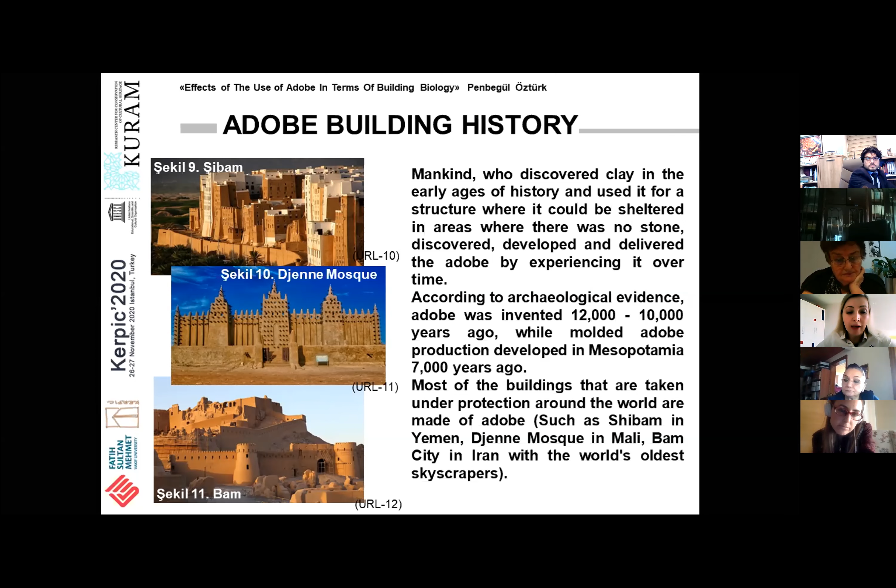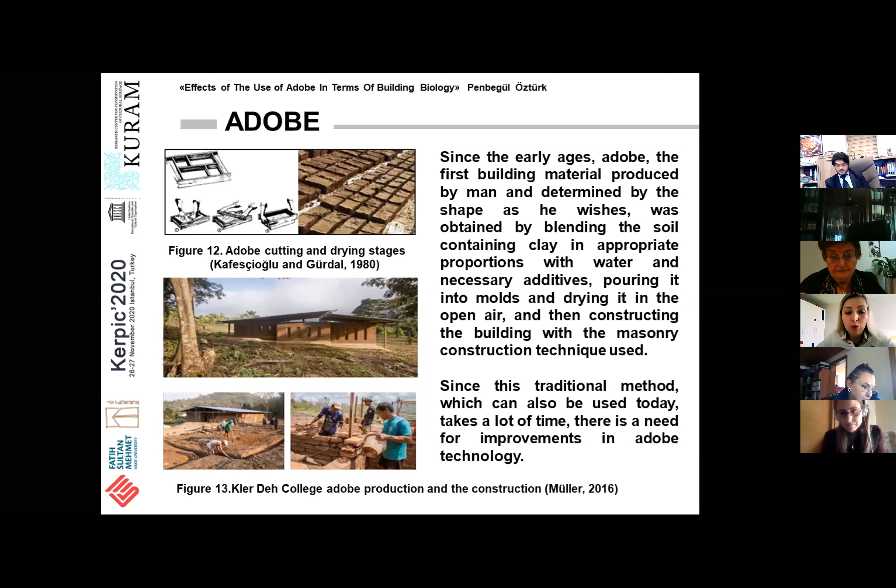İlk çağlarından itibaren insanın ürettiği ve biçimini istediği gibi belirlediği ilk yapı malzemesi olan kerpiç, uygun oranlarda kil içeren toprağın su ve gerekli görülen katkı maddeleri ile harmanlanıp yoğrularak kalıplara dökülmesi ve açık havada kurutulması ile elde edilmiş, sonrasında yığma yapı tekniği ile yapı inşasında kullanılmıştır. Günümüzde de kullanılabilen bu geleneksel yöntem çok fazla zaman aldığı için kerpiç teknolojisinde iyileştirilmelere ihtiyaç duyulmaktadır.

Kerpicin durabilitesi, yani kerpiç teknolojisi yenilenirken şunlara da dikkat etmek gerekiyor. Biraz önce de bahsettiğim gibi güvenilir yapı oluşturmak gerekiyor. Yani kerpiç yapının içerisinde konforu sağlarken önce o yapının güvenilirliğini sağlamak gerekiyor. Kerpiç yapı üretimi teknolojik olarak basit olsa da bozulmasına neden olan faktörlerden korunması yoluyla sürdürülebilir nitelikli dayanıklı yapılar üretme potansiyeline sahip bir yapı malzemesidir. Toprak malzemelerin ana zayıflıkları dayanıklılıkla ilgilidir.

Toprak taneleri su miktarına bağlı olarak nemlenirse mukavemet azalır, su fazla ve sürekli ise taneler birbirinden tamamen ayrılır, su ile beraber akarak giden yapı yıkılır.

Kerpicin fiziksel stabilizasyon, yani karışıma organik madde katkısı, mekanik stabilizasyon, yani karışımın sıkıştırılması, kimyasal stabilizasyon, karışıma alçı, kireç, çimento ve benzeri stabilizatör katmak gibi önlemlerle durabilitesi sağlanabilmektedir.

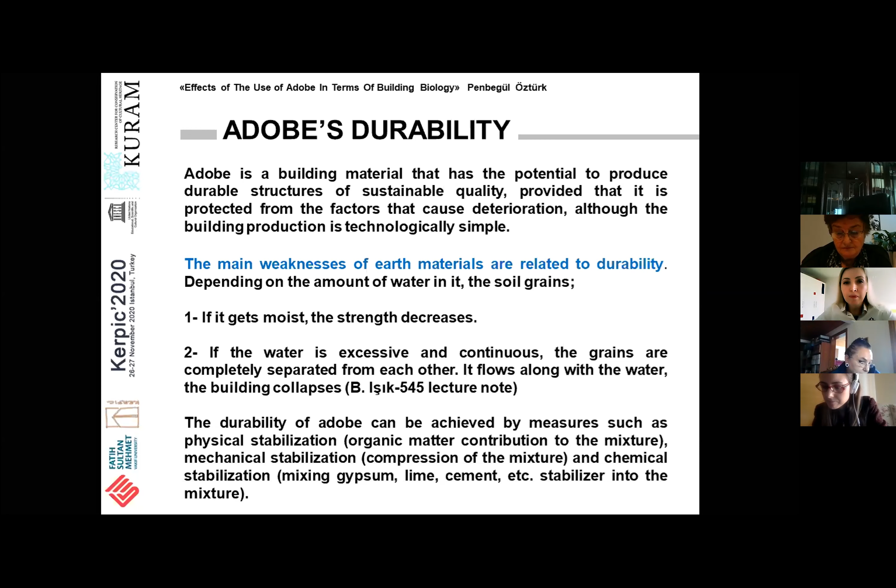Kerpiç yapı uygulamasında kerpicin konumlanacağı iyi bir zemin oluşumu önemlidir. Yağmur suyu, yeraltı suyu gibi kerpicin bütünlüğüne zarar verebilecek etkenlere karşı önlem alınmalı. Kerpiç yapı yüzeyi çatı çıkıntıları ile yüzey erozyonuna karşı korunmalıdır. Burada şekilde de yağmur etkisiyle ve zemin suyu etkisiyle yapı yüzeyindeki ve yapıdaki etkiler gözlemlenmektedir.

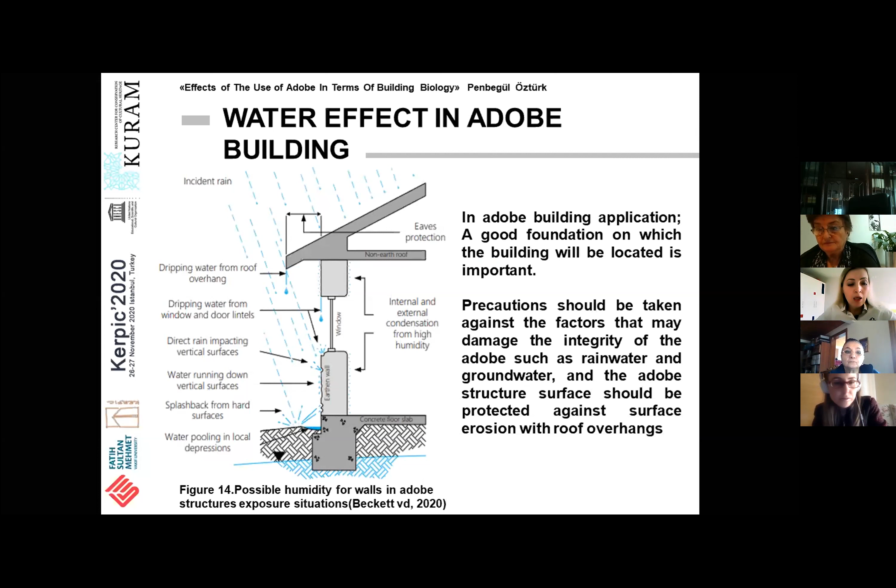Depreme dayanıklı yapı oluşumu konusunda Bilge Hocam detaylıca açıkladı, burada ben basitçe üzerinden geçeceğim. Kerpiç yapı oluşumunda depremde oluşabilecek diagonal çatlamaların önüne geçebilmek için, diagonal çatlama ve sonrasında duvardaki bu çatlamayla beraber heyelan oluşumunun önüne geçebilmek için geçmişte uygulanan bazı yöntemlerden yararlanılabilir.

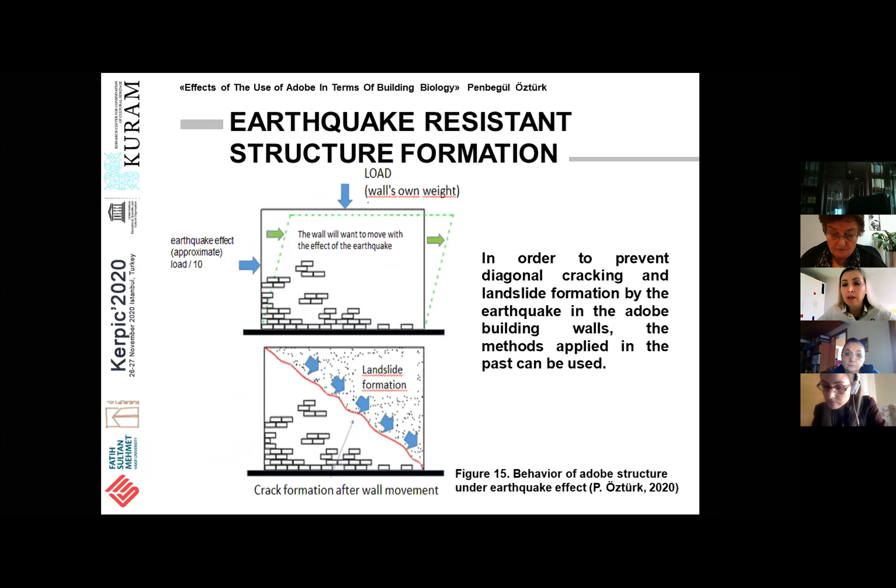Bu yöntemlerden biri, yığma yapılarda malzemeyi örerken ara ara yatayda başka bir malzeme sırası ile, tuğla, ahşap ve benzeri, örgüde malzeme değişikliği yapılarak elastisite farkı oluşturup depremde bu alanda enerji söndürme işlemi gerçekleştirmektir.

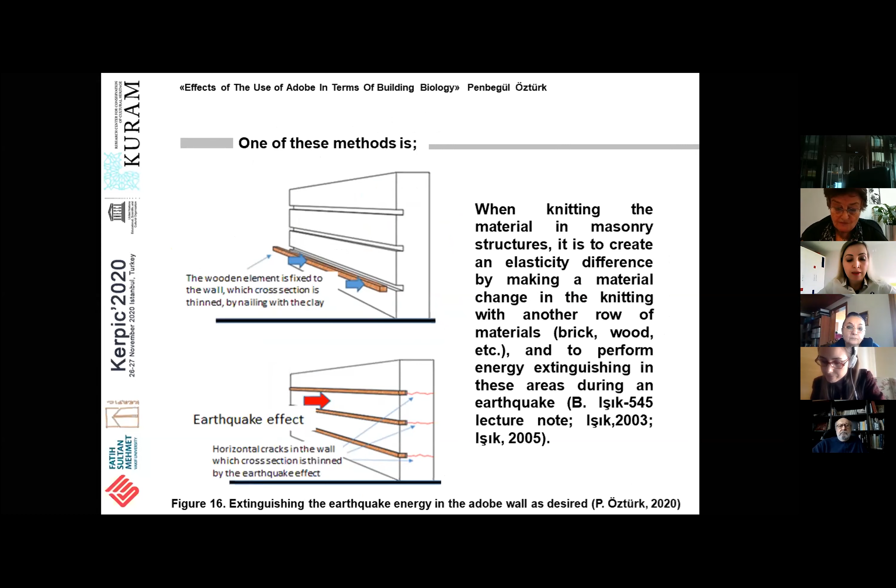Bir başka yöntem ise kerpiç yapılarda karma sistem kullanmak, ahşap taşıyıcı sistemle takviye etmek, deprem ihtimaline göre alınabilecek iyi bir önlemdir. Bunu hımış yapılarda, ülkemizde de örneklerini görmemiz mümkün.

Ayrıca toprak çatı örtüsü kullanımında toprağın altını tutacak malzeme olarak ahşap kullanılacaksa, ahşap tavan kirişlemelerinin aksları yaklaşık 40 ila 60 santim olacak şekilde yerleştirilmeli. Ahşap kirişler serbest bırakılmayıp birbirlerine gördüğümüz gibi yatayda ve çaprazda bağlantılarla sağlamlaştırılmalıdır.

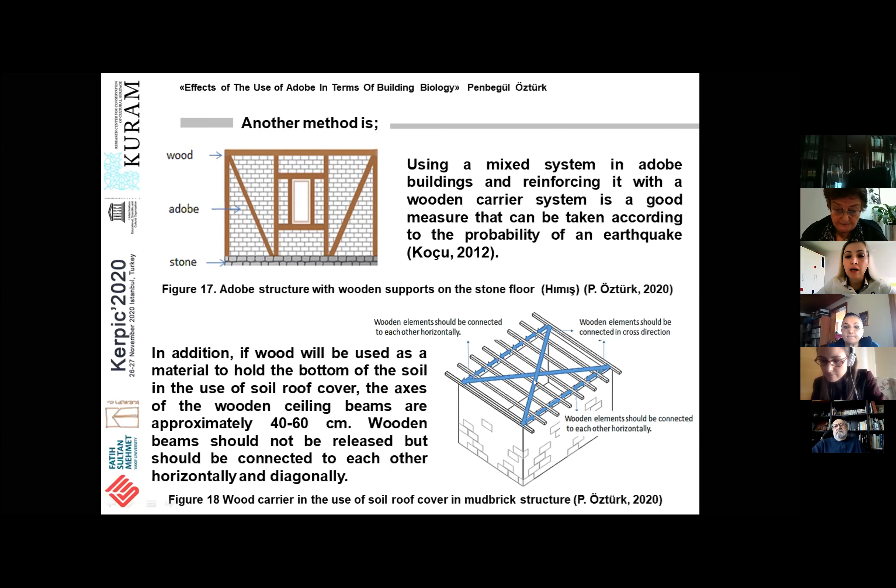Kerpiç yapı biyolojisi açısından, kerpiç %40 ila 50 sabit doğal nem oranına sahip olmasıyla biyoklimatik konfor sağlayan, yaşamak ve çalışmak için sağlıklı bir ortam sunan, gözenekli, nefes alabilen, kötü koku oluşumuna izin vermeyen, akustik konfor sağlayan bir malzemedir. Kerpiç yapılar statik elektriğe maruz kaldıklarında kerpicin ana bileşeni olan toprak gibi davranabilir ve statik elektriği insan vücudundan uzaklaştırarak daha sağlıklı bir elektroiklim oluştururlar.

Çok fazla yenilenemeyen enerji tüketmez, üretiminde çok az su kullanılır ve kullanım ömrü tamamlandığında geri dönüştürülebilir. Bir yapı malzemesine dönüşümü sürecinde herhangi bir kimyasal işlem gerektirmez ve hiçbir kimyasal veya endüstriyel atık üretmez. Kerpiç yapıların termal kütle özelliği sayesinde duvar yüzeyleri iç ortama sürekli depoladığı ısıyı salarak kullanıcı için ideal bir ısı ortam düzeyi sağlar.

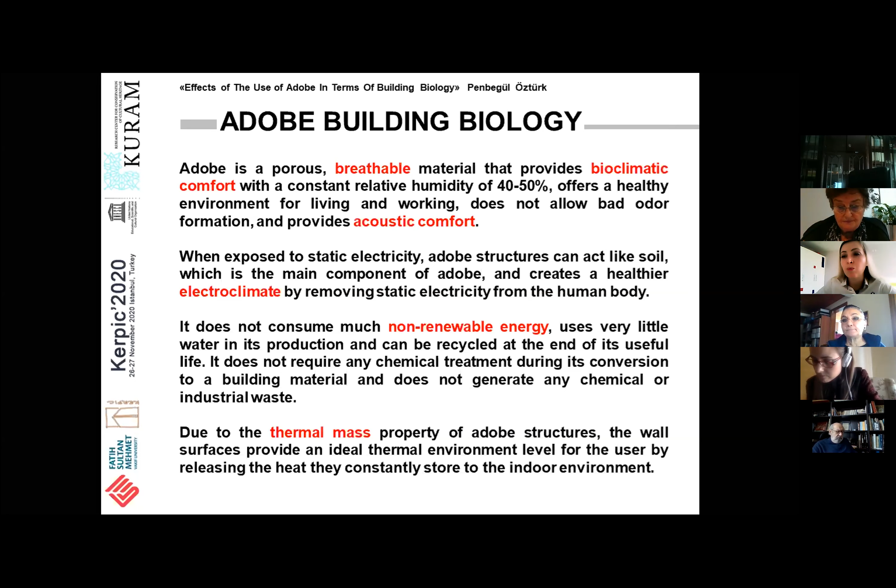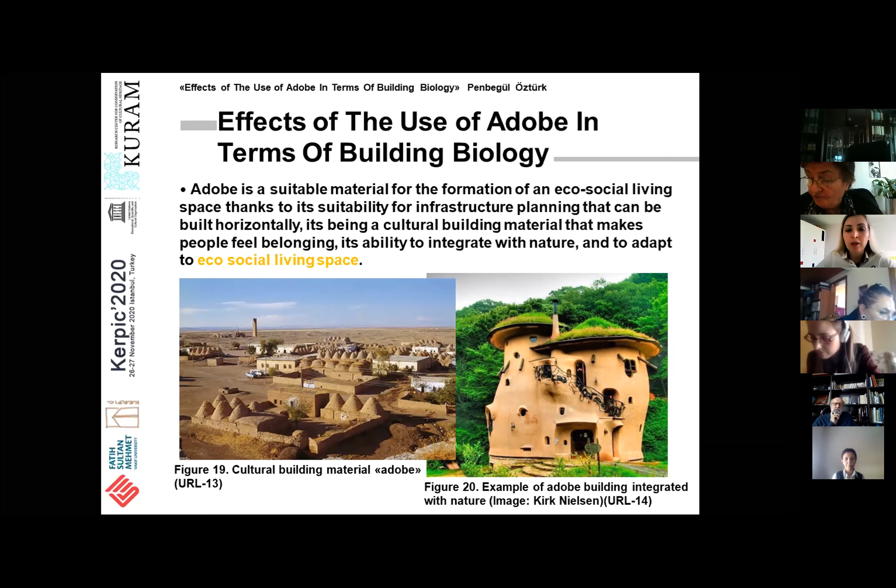Kerpici yapı biyolojisi açısından değerlendirirken 5 ana başlıkta inceleyeceğiz. Kerpicin yatayda yapılaşabilecek altyapı planlamasına uygunluğu, insanda aitlik hissettiren kültürel bir yapı malzemesi oluşu, doğa ile bütünleşebilmesi, ekolojik döngülere ve yerel koşullara adapte olabilmesi özellikleri sayesinde ekososyal yaşam alanı oluşumu için uygun bir malzemedir. Bu yapı biyolojisi ilkelerinin 5 ana başlıkta toparlandığını söylemiştik. Ekososyal yaşam alanı başlığı için bu tür özellikleri sağlayabilmekte.

Kerpiç bulunduğu coğrafyanın toprak içeriğinde herhangi bir radyoaktif madde bulunmadığı durumda hiçbir şekilde zararlı salınım ve kirliliğe neden olmaması, yüksek termal özelliği sayesinde iç mekan dengesini yönetebilmesi, higroskopik özelliği ile iç mekanda nem dengesi oluşturabilmesi ve gözenekli yapısı ile iyi bir ses ve akustik konfor sağlayabilmesi ile yapıda iyi bir termal ve akustik konfor özelliğine sahiptir.

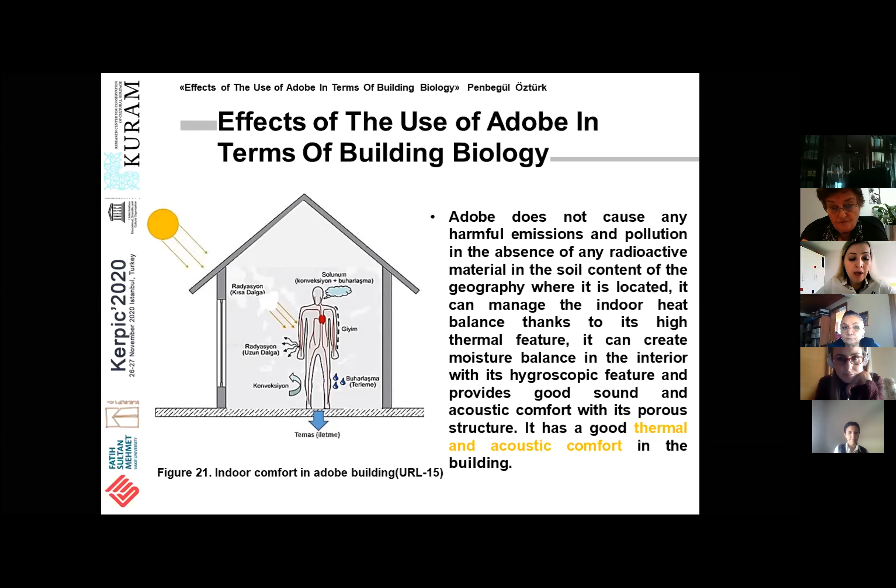Kerpiç nefes alabilen doğal bir malzeme oluşuyla mekanda sürekli temiz hava dolaşımı sağlayabilmesi, iç mekanda uygun nem dengesi oluşturması ile sağlığa zararlı küf, mantar, toz ve alerjen oluşumunu önleyebilmesi ve bu sayede iç mekanda kokusuz ve nötr bir hava ortamı sunabilmesi, içeriğindeki toprağın iyonizasyon özelliği sayesinde mekanda uygun bir elektroiklim oluşturması ve yüzeylerinde ısı depolayıp gerektiğinde radyan ısı salınımı yani ışınım yaparak iç mekanda ısıl konfor sağlayabilmesi özellikleri ile de sağlıklı bir iç mekan iklimi oluşturabilen bir malzemedir.

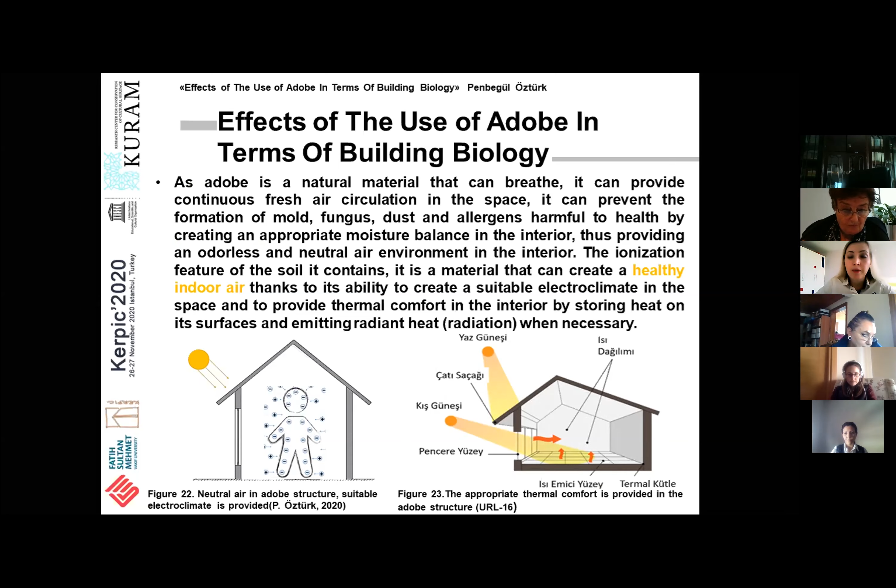Kerpiç, yerel olan toprağın yerel yöntemlerle tesis gerektirmeden, çok fazla enerjiye ihtiyaç duyulmadan yapıya dönüşümüyle enerji tasarrufu ve düşük maliyetiyle ekonomik oluşu, inşaat ve tadilat süresince çevresinde olumsuz etkisinin bulunmaması, doğal bir malzeme oluşu ile en iyi yaşama döngüsü verilerine sahip olması özellikleri ile çevre ve enerji konularında uyumlu ve tasarruflu bir malzemedir.

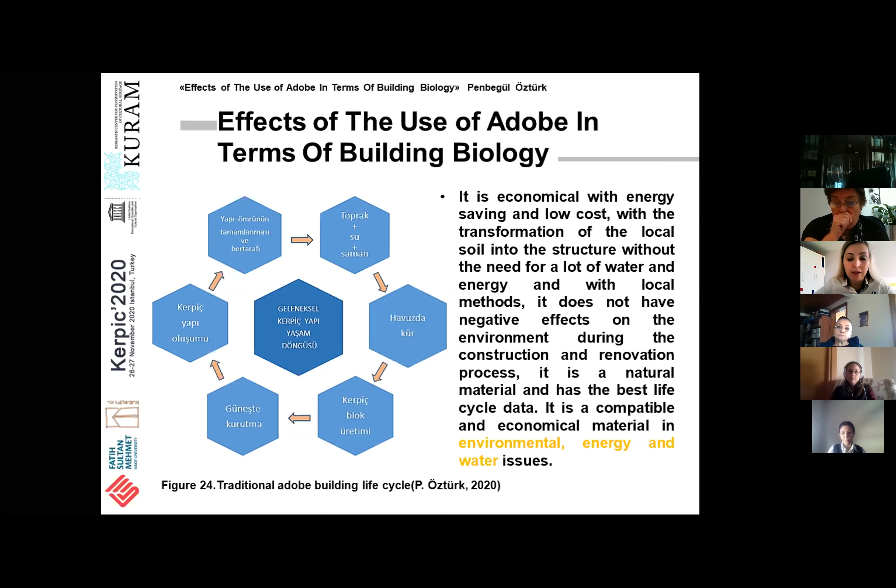Kerpiç kalıplanabilir özelliği ile oran, ölçü ve form konularında istenilen esnekliğe sahip oluşu, insanın tüm duyularına hitap edebilmesi, dokusu ve rengi ile sıcaklık etkisi, mekan örgütlemelerinde fiziksel ve mekanik özellikleri ile ergonomik tasarıma uygunluk sunması, yerel yapı kültürünün bir parçası olup zanaatlerle kaynaşabilmesi özellikleriyle insan odaklı tasarım için ideal bir malzemedir.

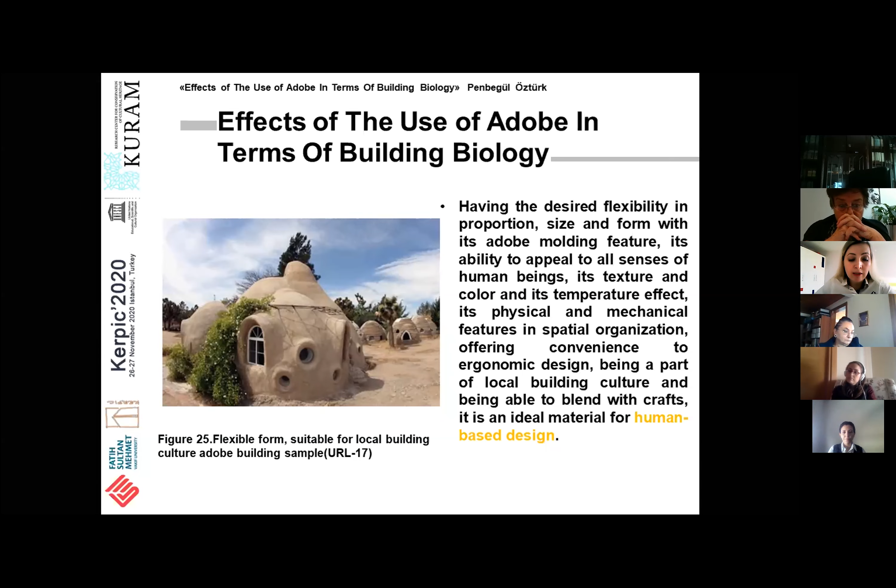Çalışmada elde edilen sonuçlar ekonomik açıdan değerlendirildiğinde bireysel olarak inşa edilen bir kerpiç yapıda yerel malzeme ve iş gücüyle yapılaşıldığı için yapım aşamasında ve kullanım süresince ekonomi sağlanacaktır. Sanayi ürünü olarak kerpiç kullanımında yapılaşma sırasında ekonomi sağlanamasa da kullanım süresince termal kapasite özelliği ile uygun iç mekan konforu sağlandığı için yaz ve kış aylarında ısıtma ve soğutma için enerji tüketimi en az seviyede olacaktır. Dolayısıyla bireysel ve ülke ekonomisi için büyük katkı sağlanacaktır.

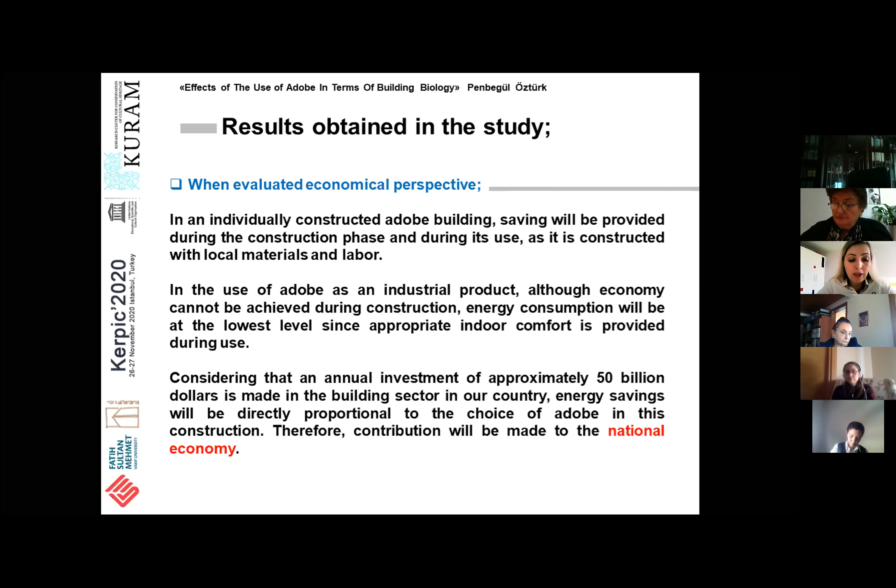Ülkemizde yapı sektörüne yıllık yaklaşık 50 milyar dolarlık bir yatırım yapıldığı göz önünde bulundurulduğunda, bu yapılaşmada kerpiç tercihiyle doğru orantılı bir enerji tasarrufu elde edilecektir. Dolayısıyla ülke ekonomisine katkı sağlanacaktır.

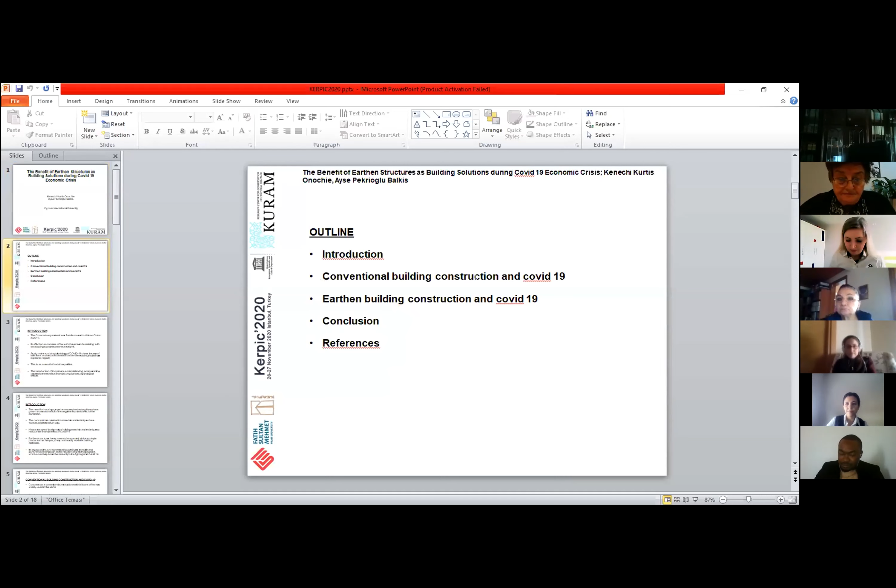The topic I'll be presenting is the benefit of earthen structures as building solutions during the COVID-19 economic crisis. And the outline for this presentation would cover introduction, the relationship between conventional building construction and COVID-19, earthen building construction and COVID-19, conclusion, and some references.

As we all know, the coronavirus pandemic was discovered in Wuhan, China in 2019, and since its inception, it has greatly affected economies in the world, and the most hit economies are the developing economies. And this is actually as a result of the social inequalities that play out. And also the introduction of the lockdowns, the social distancing, and the quarantine created serious financial, physical, and psychological effects on nations of the world.

And in terms of building, before the pandemic, there has been a growing need for housing. There has been a serious deficit. And as a result of this pandemic, there has been rising inflation in every economy of the world. And this also includes the cost of building materials. And in this case, we really need an alternative building material. It has always been the case before the pandemic, and with the pandemic, it only grew worse.

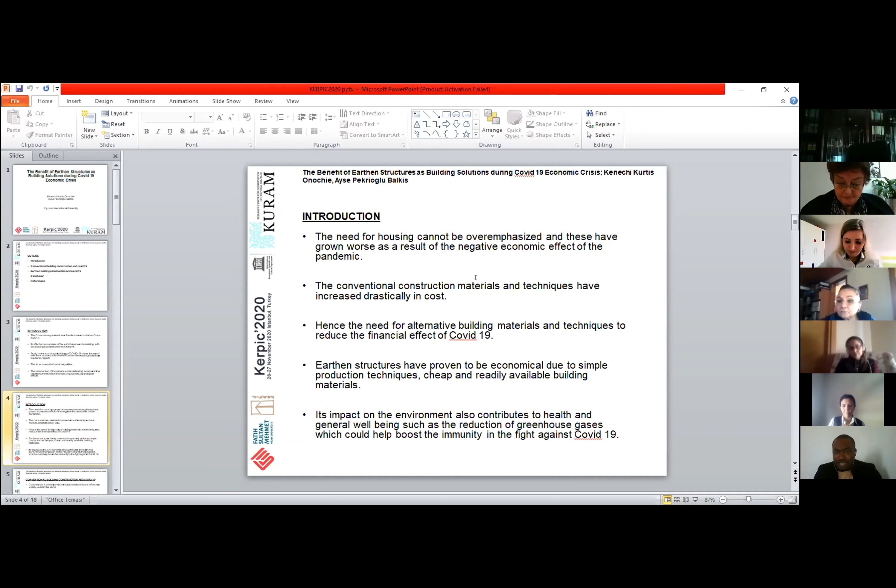And earthen structures seem to be a very good alternative because they have proven to be simple to produce, cheap, and the materials are actually readily available. And also their contribution to the reduction of greenhouse gases to boost immunity also comes in handy.

In terms of the relationship between conventional building construction and the coronavirus, we know concrete is the most common conventional construction material, and this is as a result of its superior mechanical properties, which include compressive and flexural strength. And in the production of concrete, cement is one of the most important materials. And cement happens to be a major contributor to the release of carbon dioxide from the decomposition of calcium carbonate and fossil fuels used for generating heat.

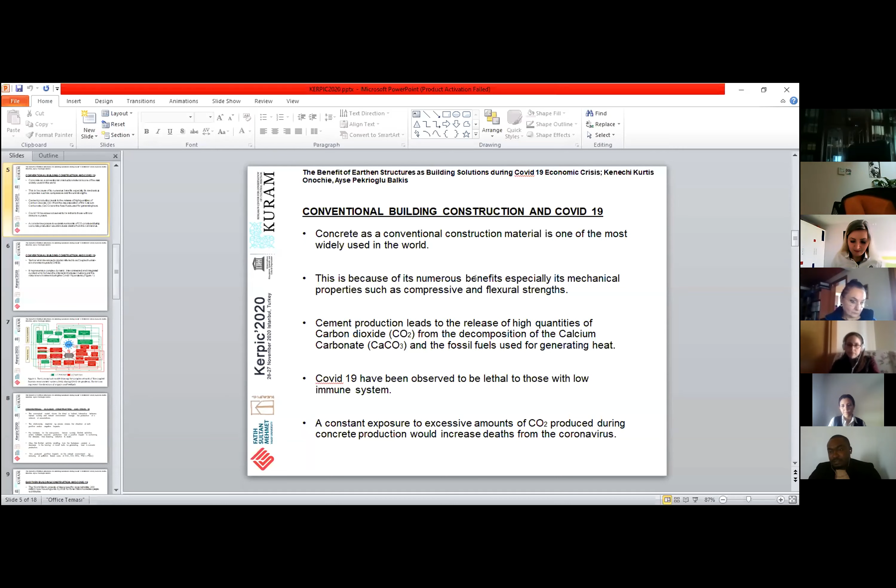And studies have shown that coronavirus has greater effects on people with low immune systems. And research has also shown that constant exposure to carbon dioxide actually increases deaths and reduces the immune system, which could lead to death as a result of the coronavirus.

Now, Sakar developed a model which he referred to as the coupled human environment system. It actually shows an interaction between humans and the natural environment during the coronavirus pandemic. And this is what the interaction looks like. So I'll just take one of the interactions to buttress my point. During the coronavirus, there was lockdown and restrictions. And as a result of the lockdown restrictions, offices were shut down.

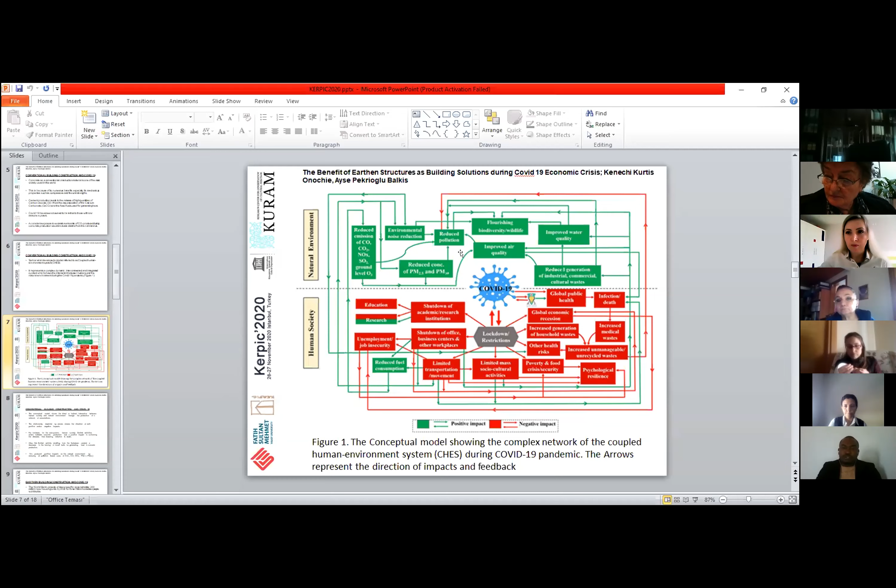And as a result of the shutdown of offices, businesses, and other workplaces, in which I would also include production plants for concrete, where we could have release of carbon dioxide and other harmful greenhouse gases. If you follow this, the red line shows the negative impact, and the green line shows the positive impact. And if we follow this, we could see that this leads to improved air quality. And as a result of improved air quality, we have reduced pollution. And the reduced pollution in turn would lead to reduced infection and death rates.

Also, I think that's the relationship I just talked about. Then for the earthen building construction, like I mentioned earlier, there's a deficit, which the World Bank projects, of 300 million new houses needed to meet the housing needs. And there's also growing pressure on governments to close this gap as a result of the rising housing demands, even during the pandemic, because during the lockdown, everyone was asked to stay at home.

And we know that there's a huge chunk of homeless people all over the world, and the need for providing adequate and affordable housing to the less privileged and low-income earners would always be related to production and the cost of construction materials, and also the technology.

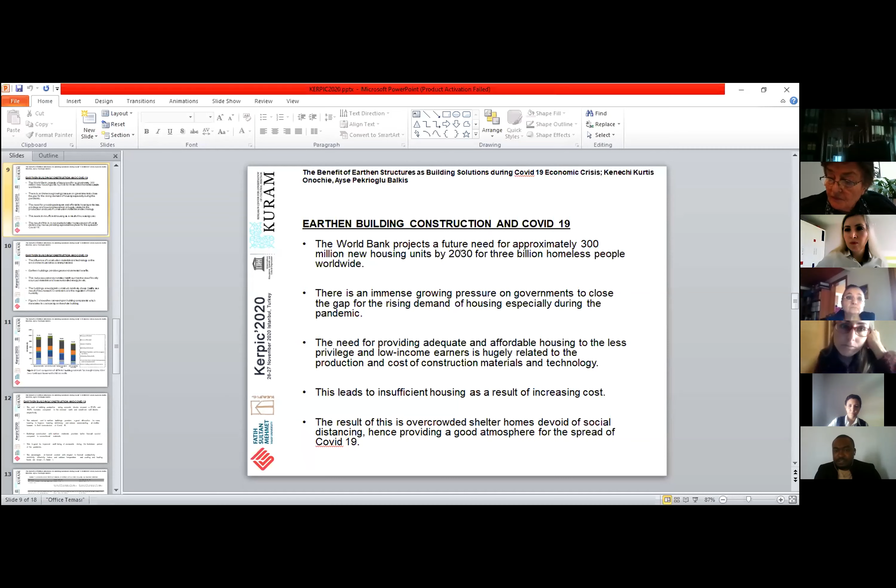And as a result of this deficit of housing, shelter homes, because when the lockdown was declared, everyone was expected to be at home to reduce the spread of the virus. And those who were homeless were actually forced to move into shelters. And this resulted in overcrowded shelters, which was very common, especially in the United States. And this also led to the spread of the coronavirus.

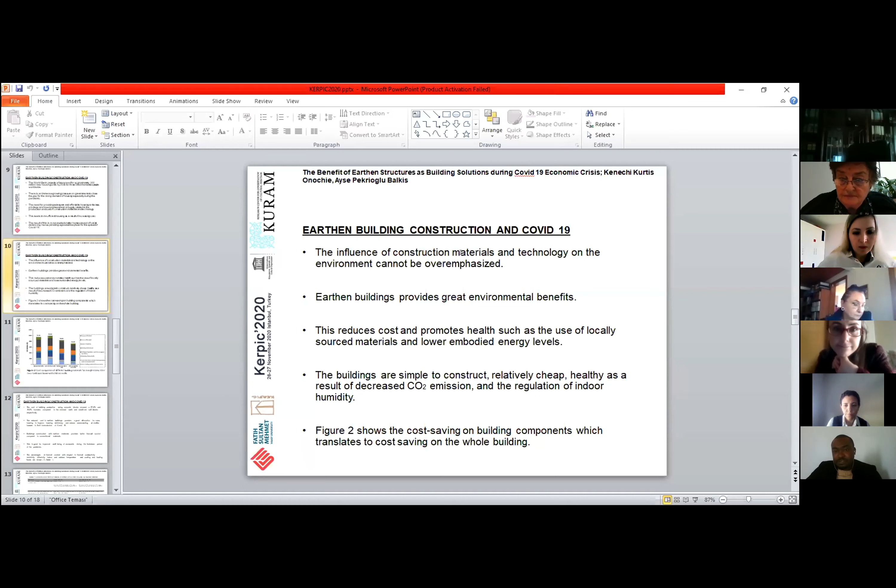Now, the influence of construction materials and technology on the environment cannot be overemphasized. Earthen buildings provide great environmental benefits as well, as we earlier mentioned, due to their decrease of CO2 emissions and also the regulation of indoor humidity. And we have another figure here, which shows us.

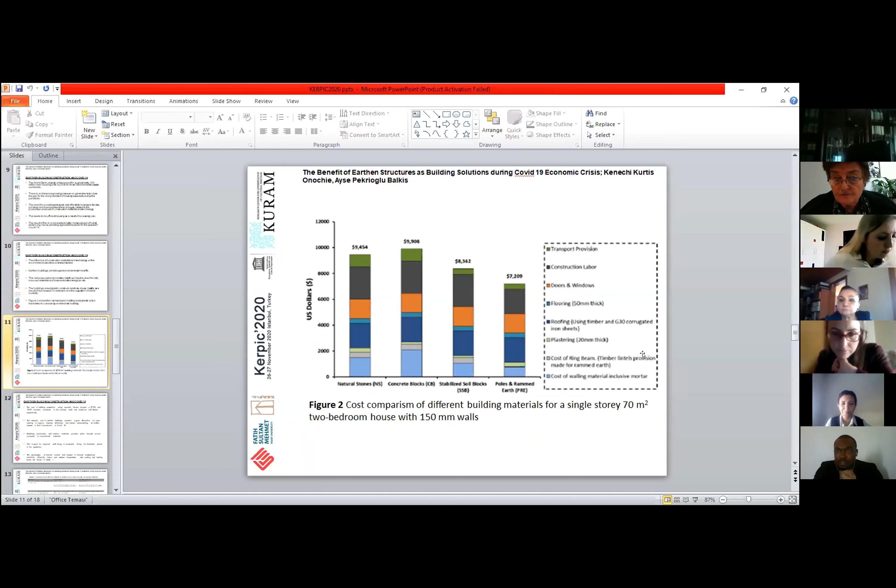Excuse me, Mr. Kenechi? Yes. Attendees are asking if you can make the presentation full screen. It would be easier to read. Oh, okay, sorry. Okay. I hope it's better now. All right, thank you.

So our figure 2 shows a cost comparison of different building materials for a single-story, 70 square meter, 2-bedroom housing. And from all indication, you can see that the building constructed of concrete blocks showed about 37.4% increase compared to that constructed of rammed earth, and about 18.5% increase compared to that constructed of stabilized soil blocks.

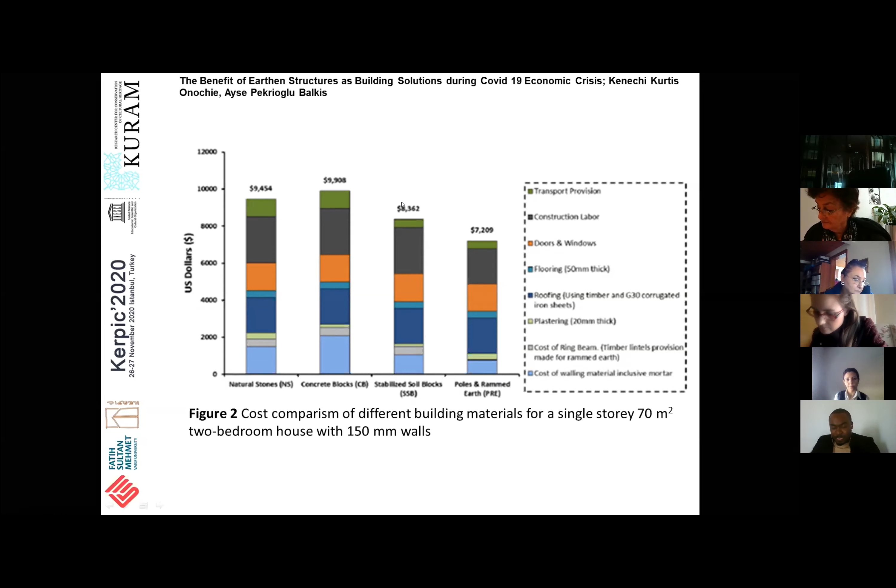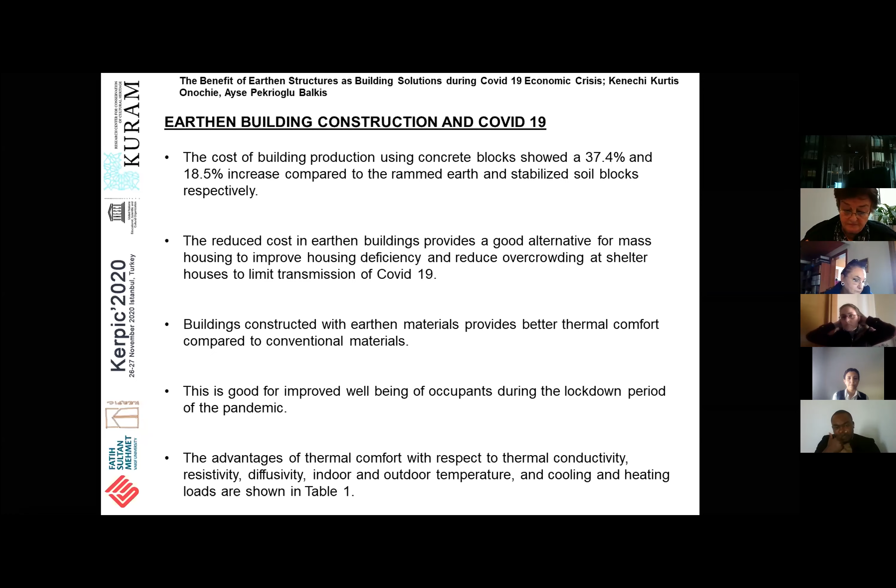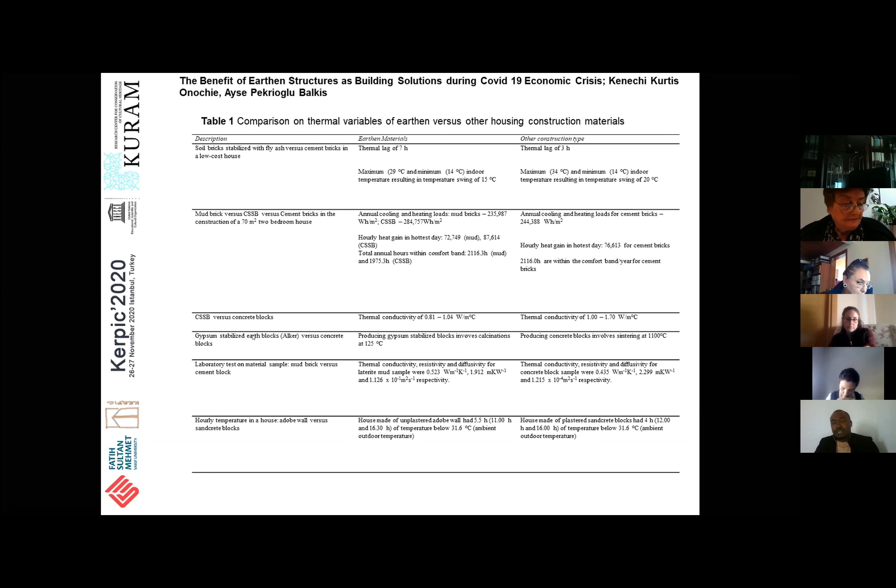Now, research has also shown that earth materials are poor conductors of heat, and hence they slowly absorb heat in the day, thereby leaving indoors cool, which explains the thermal lag. The use of heating and cooling systems can also be minimized, hence reducing costs during the pandemic. For example, during the lockdown, higher heating and cooling was used in conventional building materials compared to earthen building construction.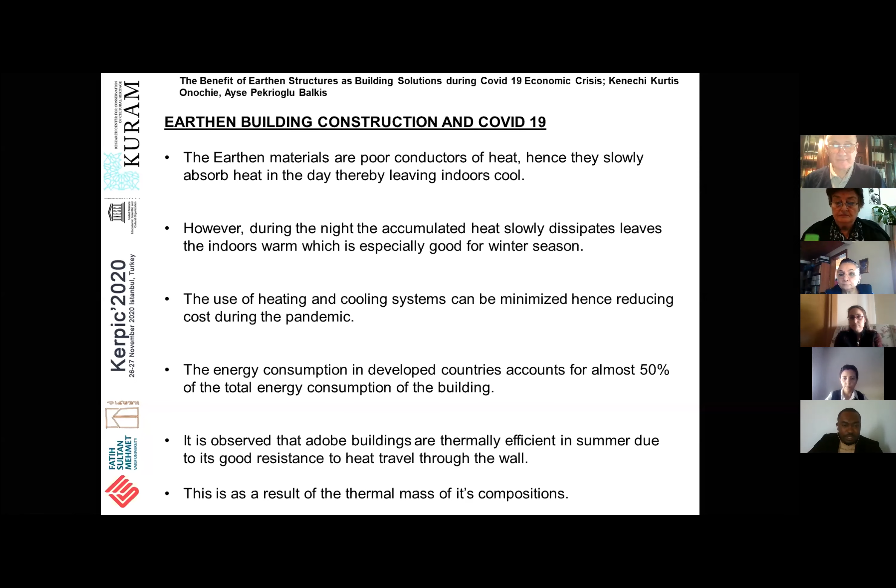And the energy consumption in developed countries is known to account for about 50% of the total energy consumption of buildings. It is also observed that adobe buildings are thermally efficient in summer due to their good resistance to heat travel through the wall, which can be explained from the thermal lag as well. This is a result of the thermal mass of its composition.

Now, in conclusion, it's common knowledge that since the COVID-19 virus surfaced, it has severely affected countries all over the world, and the need for alternative building materials continues to grow as a result of the growing demand for housing. And earthen structures also prove to be economical due to their simple production techniques. They are cheap, readily available building materials compared to the conventional materials.

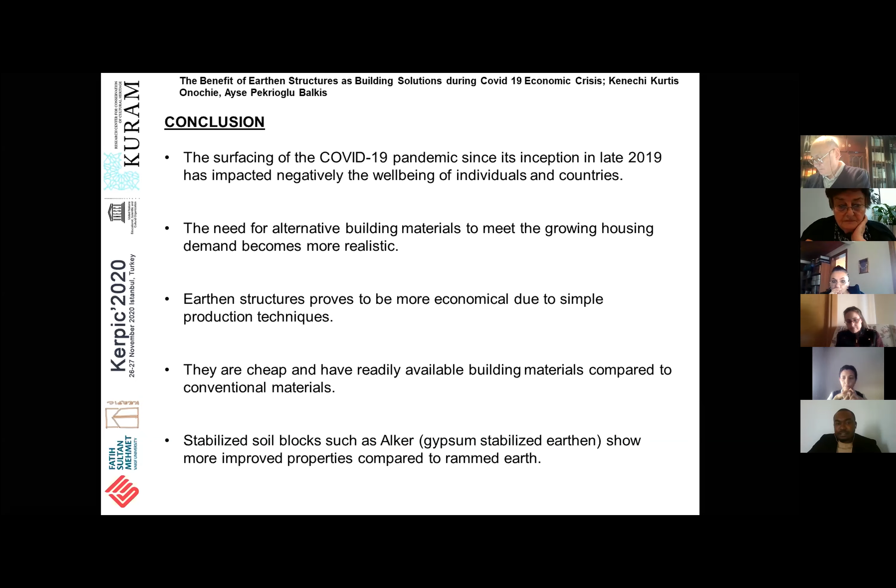And stabilized soil blocks such as Alker, gypsum stabilized earth, show more improved properties compared to rammed earth. And the production process of these earthen structures also improves the environment by reducing greenhouse gases, which would contribute to health, the boosting of immunity, and general well-being during the COVID-19 pandemic. This thermal comfort can also be achieved without rising heating, cooling and ventilating costs.

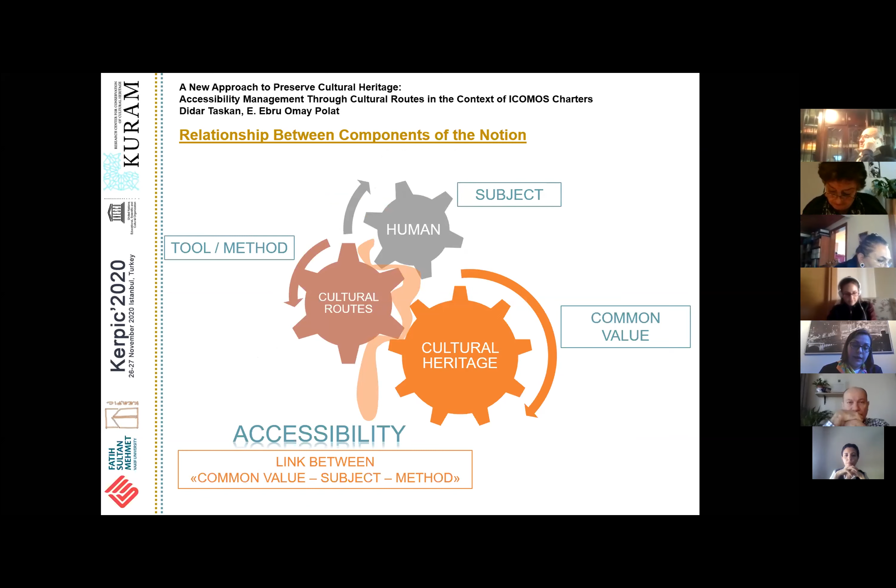A holistic approach widens and complicates the framework. A methodical solution is needed to analyze, set, and organize. In this matter, cultural routes might be a solution as a part of accessibility management. It incorporates both tangible and intangible cultural heritage and creates opportunity to experience it. As I told in the beginning, in this presentation accessibility management of cultural heritage through cultural routes will be discussed in the context of two ICOMOS charters: the ICOMOS Charter for the Interpretation and Presentation of Cultural Heritage Sites, and the ICOMOS Charter on Cultural Routes. This conceptual framework will be evaluated in the example of Yazd, Iran.

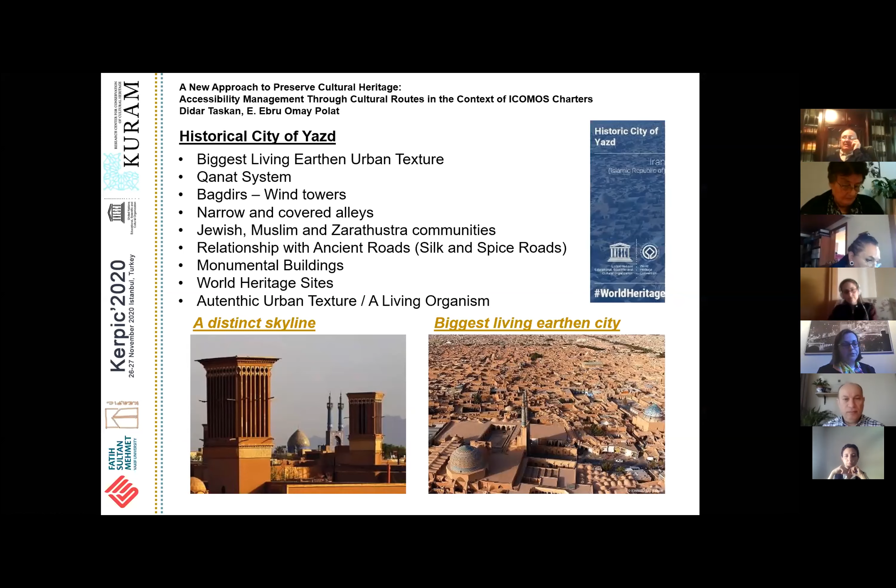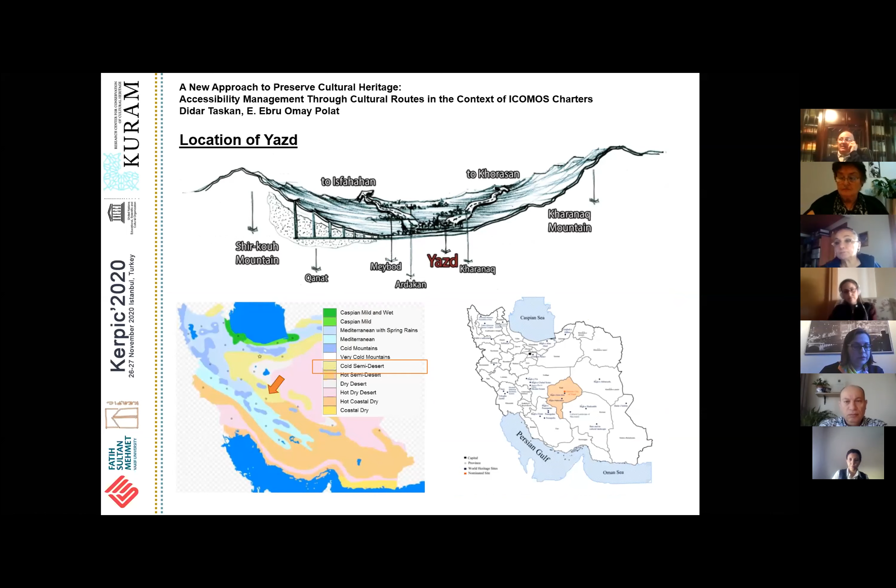Yazd is the biggest living earthen city today with a distinct skyline. The historical city of Yazd was added to the World Cultural Heritage list in 2017. Yazd is located in the plateau of Iran and is close to the Spice and Silk Roads. While most of the earthen cities were destroyed by modernization, in that challenging desert climate Yazd maintained its original texture and its authentic elements and developed within different states. In the city of Yazd, buildings are built of earth, which is a highly effective material to provide and retain air conditioning, particularly in this geography.

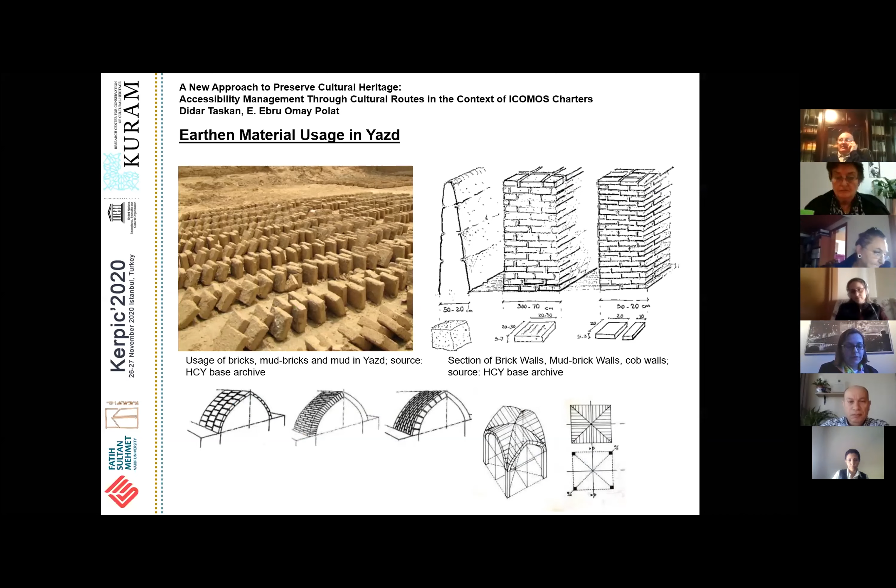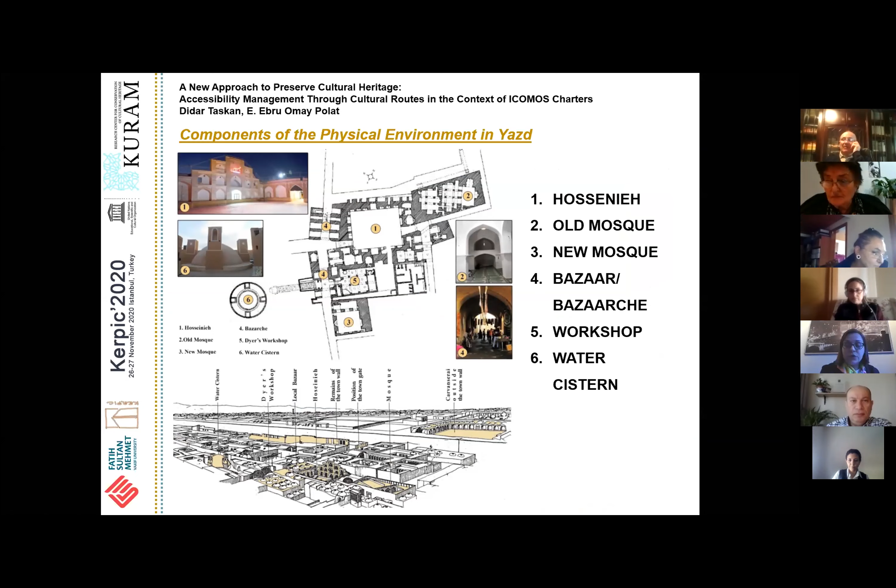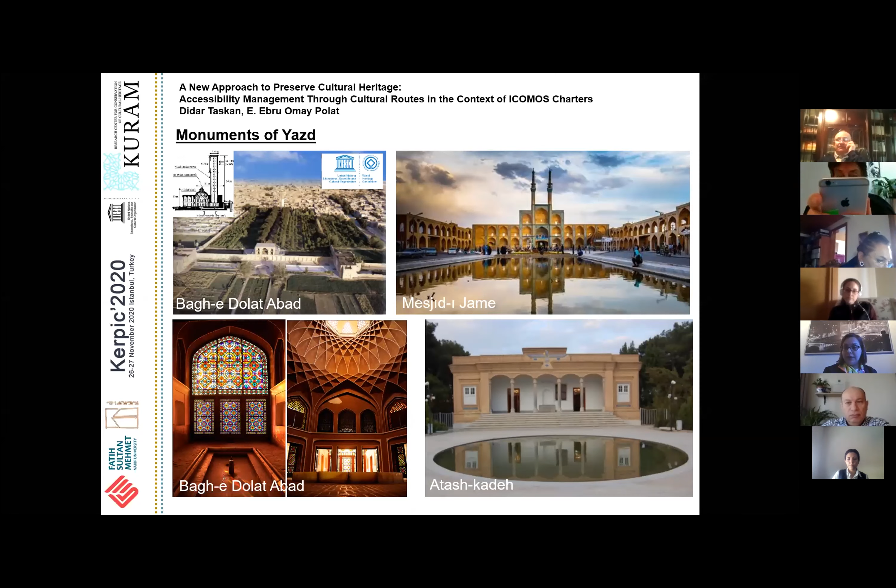Earthen material is part of the cultural diversity of Yazd city. Its traditional districts, which generated a spatial urban fabric with narrow alleys, qanat system, traditional houses, bazaars, Hosseniehs, mosques, synagogues, and, as you can see in the pictures, Zoroastrian temples and the historic garden of Dolatabad, are pieces of that living organism. Traditional living, festivals, and ceremonies are also inseparable parts of this living organism that reflects the complex structure of Yazd.

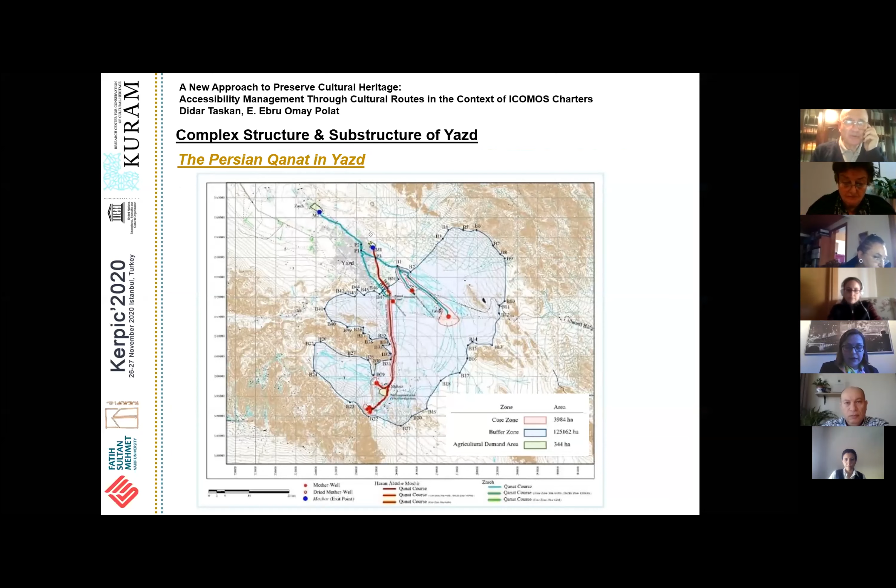The Qanat system is a substructure that gives life to the cities. The Persian Qanat is also on the World Heritage List. We can see here the Qanat of Zarch in Yazd and Hasan Abad-e Moshir, and their buffer zone. Interpretation of the Qanat system and its organic tie with wind towers and cisterns is especially important to understand the essence of Yazd. Whereas the Qanat system goes underground and lies into the desert, it became hard to track.

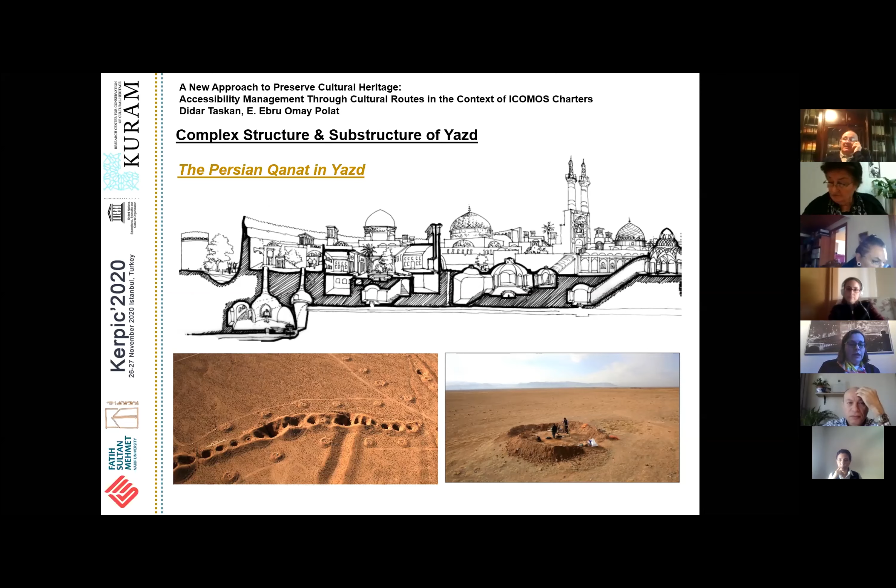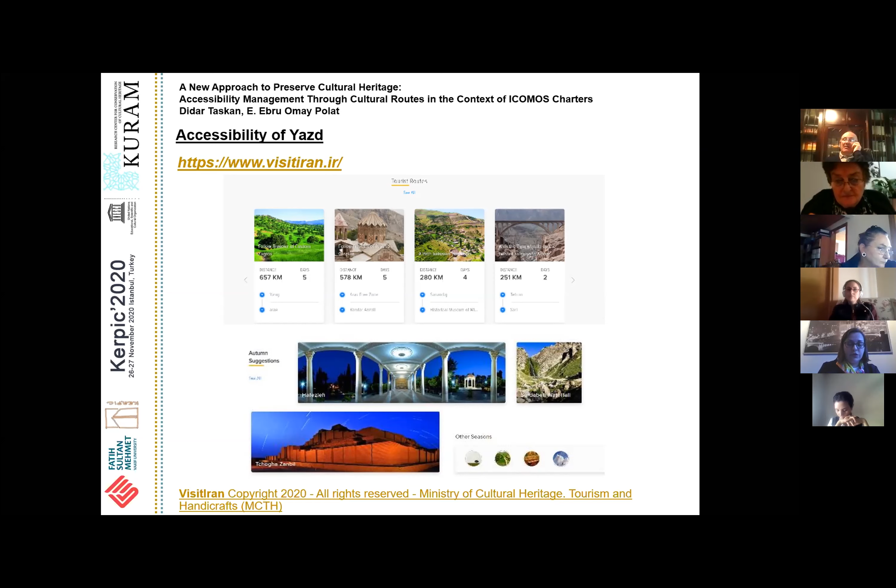While we're having a major disaster like COVID-19, online access to cultural heritage is one of the current arguments, whether it's right or wrong to reach cultural heritage fully online. On the other hand, we can't overlook that everyone has the right to access cultural heritage, and it's a necessity to use digital instruments, such as virtual reality or augmented reality.

Economic accessibility consolidates the relationship between stakeholders that depend on each other to support and sustain the development of existing environments. Iran has a national strategy on preserving cultural heritage that underlines specific topics, like identifying, protecting neighborhoods, or the Preservation Act of Iran.

Are our physical access facilities, such as signage for heritage sites, information boards, or info points, effective enough, especially for places which are usually visually limited, like cisterns, or unseen on the surface, like qanat wells? An on-site control mechanism and some kind of virtual tools can help to experience the place without being there.

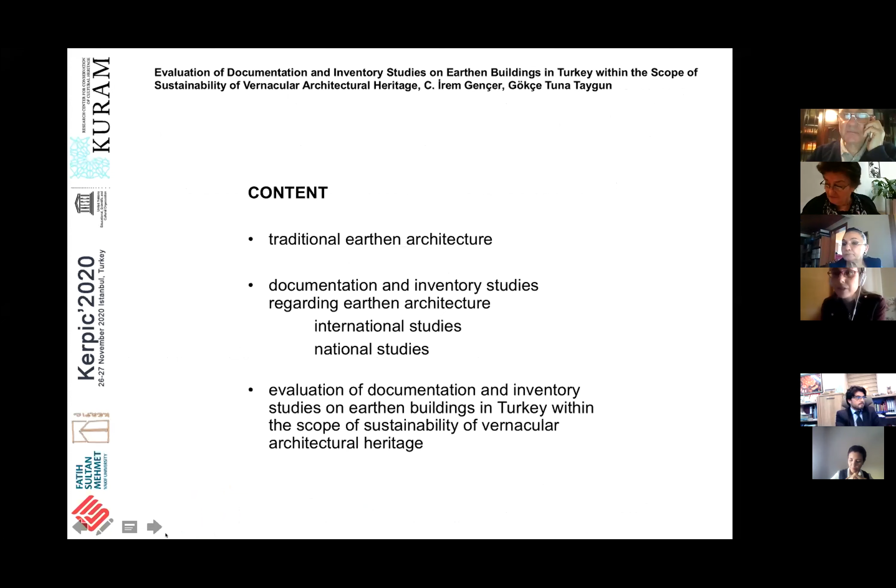Our title is Evaluation of Documentation and Inventory Studies on Earthen Buildings in Turkey within the scope of sustainability of vernacular architectural heritage. And the content of our paper is, as you see here, we'll briefly mention traditional earthen architecture and focus on documentation and inventory studies regarding earthen architecture, mostly international studies and some national studies, and then we will make an evaluation of these studies.

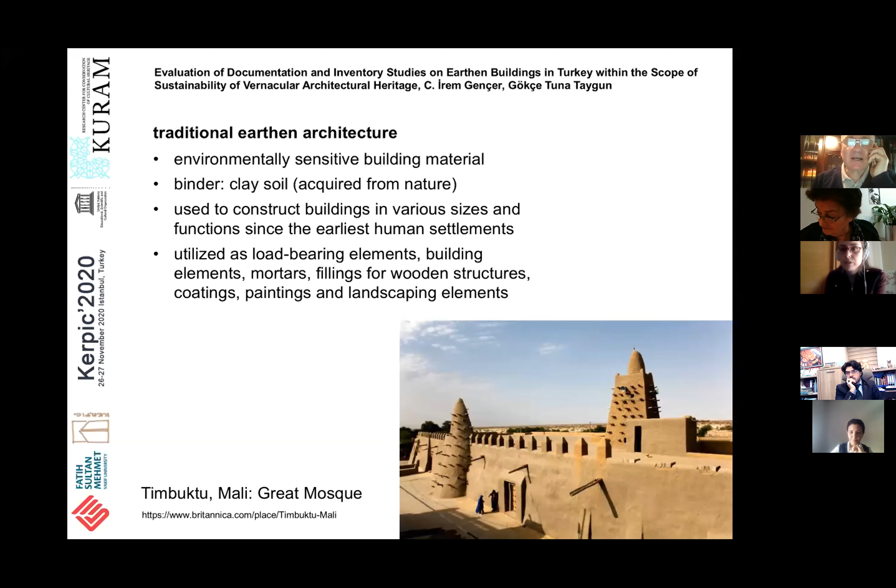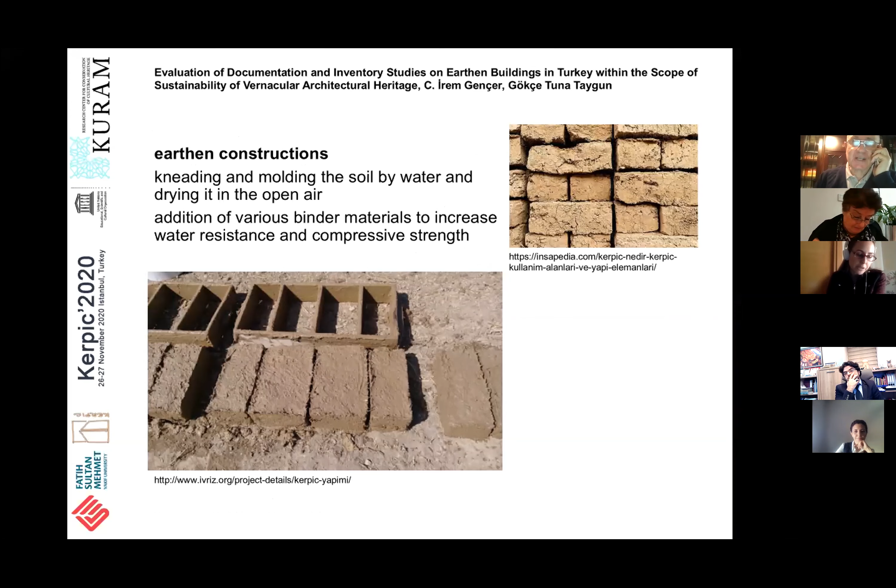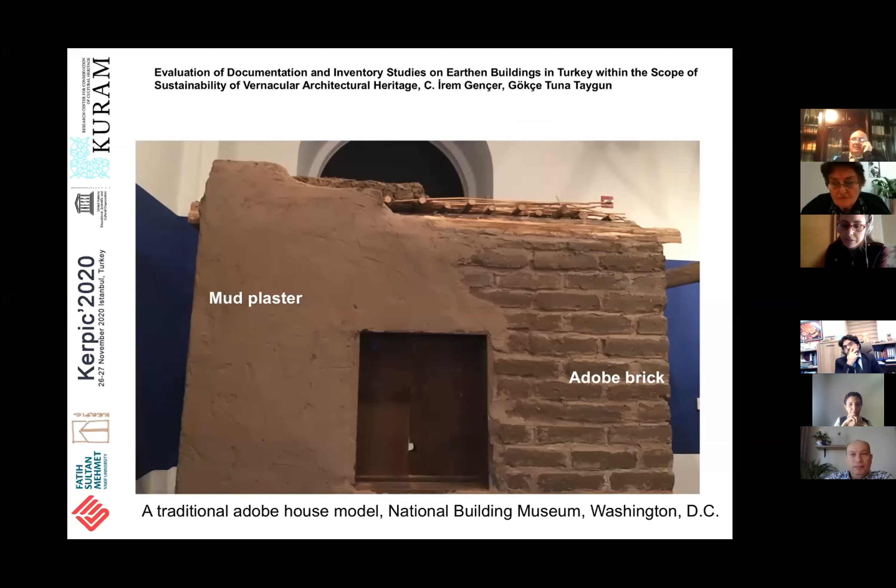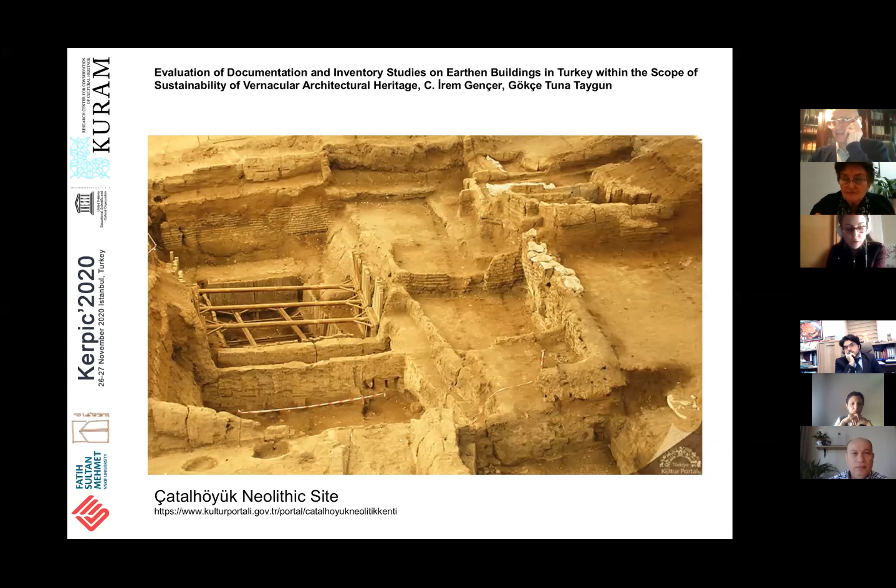The history of earthen constructions in Turkey dates back more than 5,000 years, as you see here in one of the most famous sites, Çatalhöyük Neolithic site in Turkey. Besides archaeological sites, earth is also widely found as a building or structural material in traditional buildings in Turkey. For example, in Central, Eastern, and Southeastern Anatolia, adobe or soil constitutes the wall construction or the roof constructions, while in other regions, adobe blocks are used as an infill material in timber frame structures.

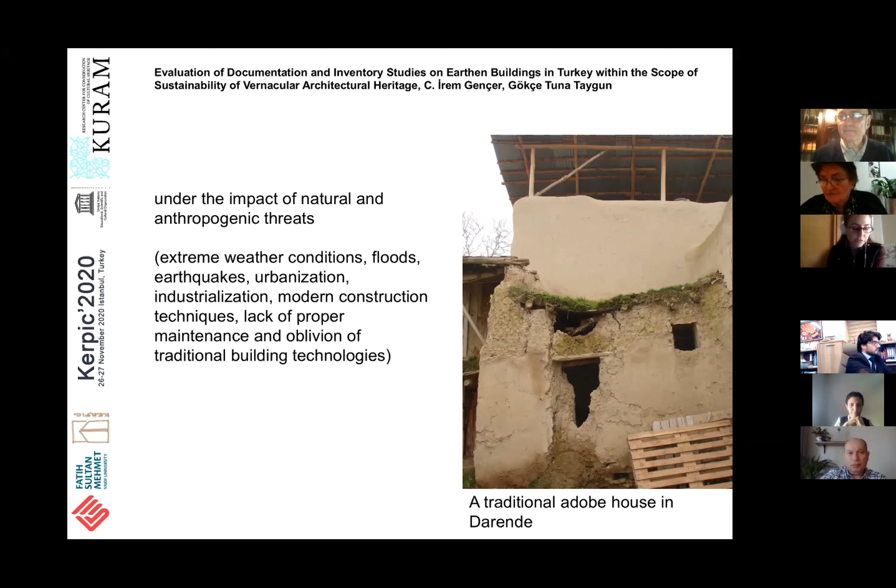There are several international organizations working on the documentation and inventory and also protection of earthen heritage at risk. Since the 1970s, the International Council on Monuments and Sites, ICOMOS, and the International Scientific Committee on Earthen Architectural Heritage, ISCEAH, a sub-body of ICOMOS, are working actively on preservation of earthen structures. There is also the Getty Conservation Institute in the United States, and also UNESCO's World Heritage Programme on Earthen Architecture. And there was a European Union-funded project named Terra Incognita. And there is also another organization called PROTERRA, which can be listed as similar organizations related to earthen heritage.

Since the 1970s, ICOMOS and ISCEAH organized Terra, a series of international conferences, to promote the exchange of information and greater understanding of earthen buildings. The focus of these conferences ranges from archaeological sites to existing earthen structures, conservation methods, construction techniques, management planning, cultural landscapes, and also disaster preparedness and mitigation.

In 1997, the Getty Conservation Institute joined with several other organizations for a cooperative framework called Project Terra for the promotion of research and conservation of earthen architectural heritage. As a result of this project, a bibliography on earthen architecture was compiled that includes different scientific fields related to earth architecture, such as mineralogy, clay science, and soil science. And also a comprehensive literature review was prepared within this project.

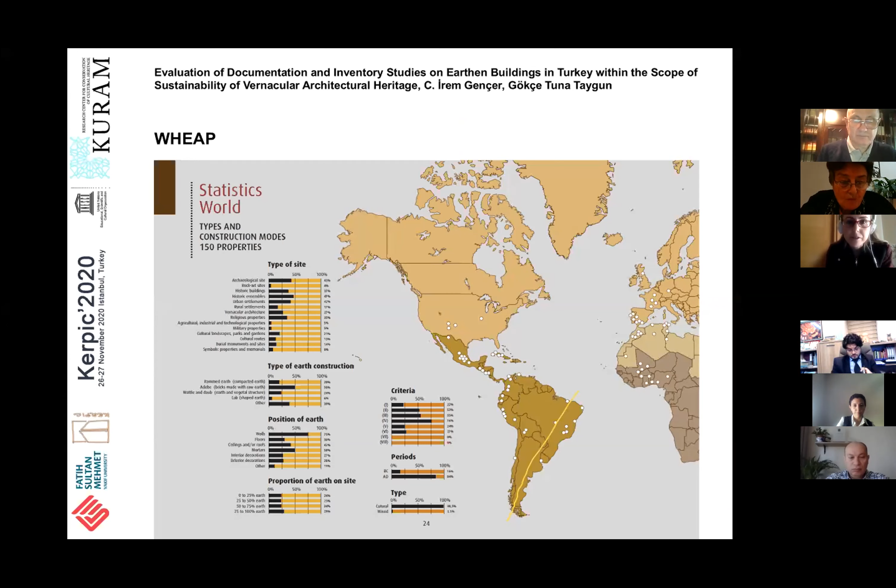The inventory study revealed that a quarter of the sites included in the World Heritage List in Danger are earthen sites. We see some examples from the outcomes of this project and statistics around the world regarding these World Heritage earthen properties, their types, and construction techniques, all over the world and in specific regions such as Africa, along with an example of the inventory sheet showing the criteria for inclusion and the risks to preservation.

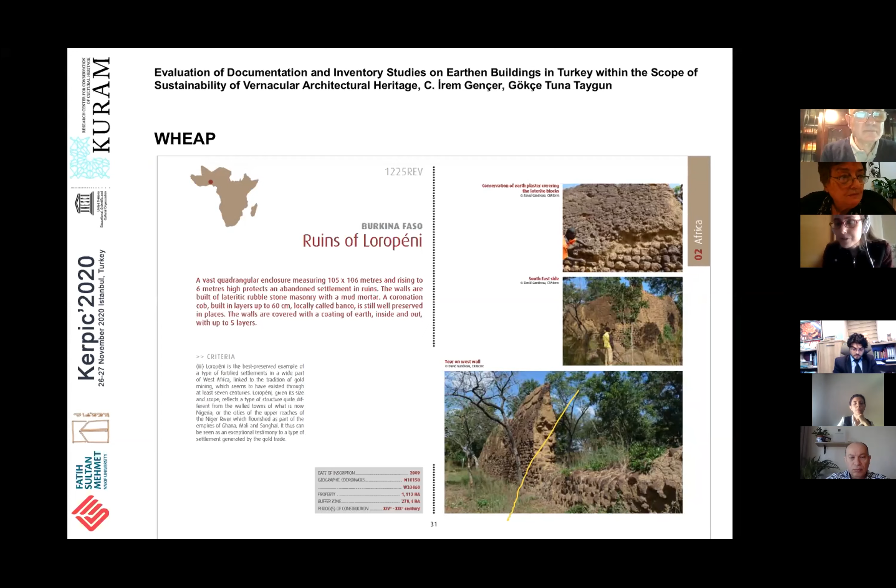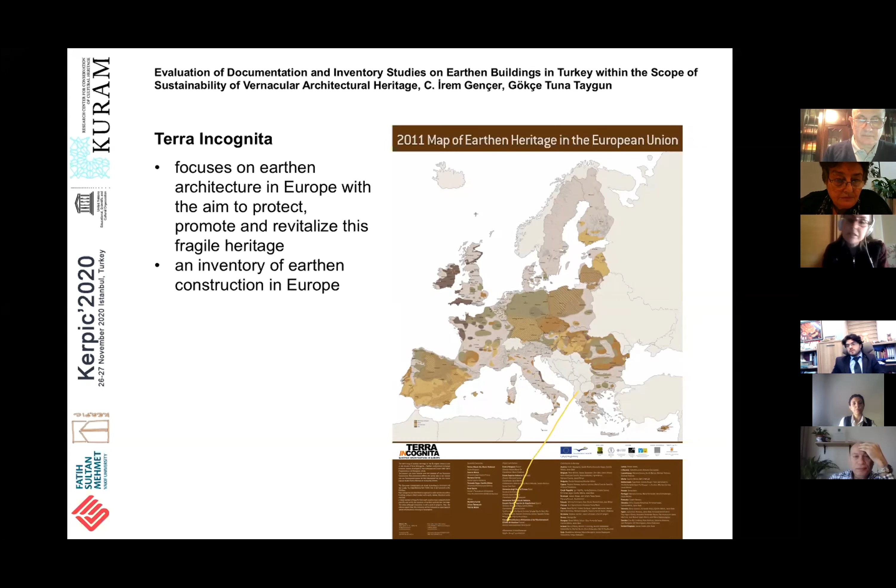Even though there is no scientific institution focusing on earthen heritage in Turkey, the Turkish Academy of Sciences, TÜBA, has been working on the documentation of vernacular and rural heritage in Turkey since 2001, including earthen structures. TÜBA established a cultural inventory project aimed at preparing inventories, compiling digital databases, and defining problems and innovating solutions for the preservation of cultural heritage in Turkey with the help of academic members, experts, and researchers.

Within this project, two pilot regions were selected first: Buldan in Denizli in the Aegean region of Turkey, and Birecik-Suruç in Şanlıurfa in southeastern Anatolia. After these two pilot projects, the work disseminated into other regions of Turkey.

Another important contribution to the documentation of earthen heritage in Turkey worth mentioning is the KERPIC network, which has been conducting research on durability, seismic response, and production techniques of earthen constructions in Turkey for more than 30 years, which also includes this conference series.

Evaluation of documentation and inventory studies on earthen buildings in Turkey within the scope of sustainability of vernacular heritage: vernacular architecture is the manifestation of both the tangible and intangible assets of culture, combining traditional construction techniques and local materials, presenting a morphological response to environmental conditions and the socioeconomic and cultural characters of societies.

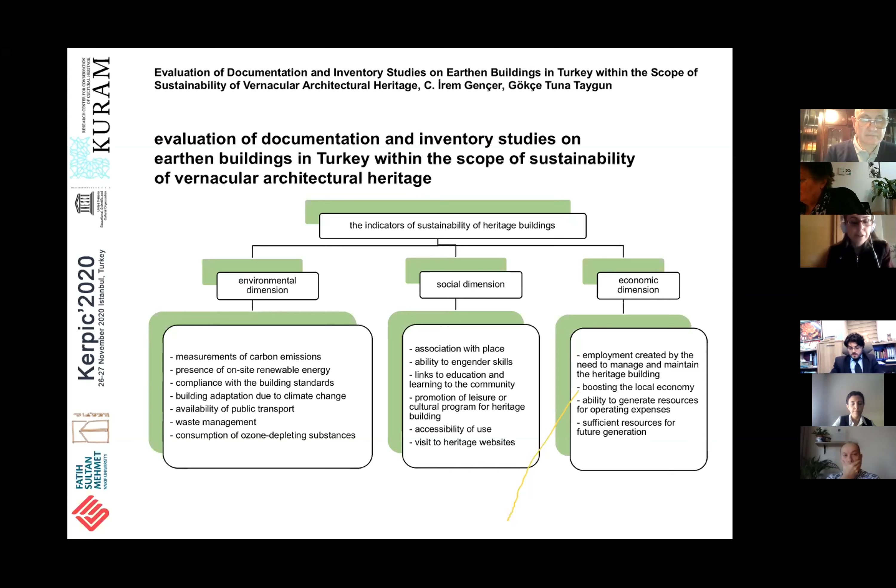The socioeconomic changes in Turkey in the last decades have made adobe buildings less desirable, leaving most of these structures in a neglected, abandoned, deteriorated, and even partially destroyed condition. The inventory, documentation, and detailed study of the production and construction systems of traditional earthen architecture in Turkey is an especially important and urgent issue, considering that adobe architecture is being rapidly dilapidated and destroyed.

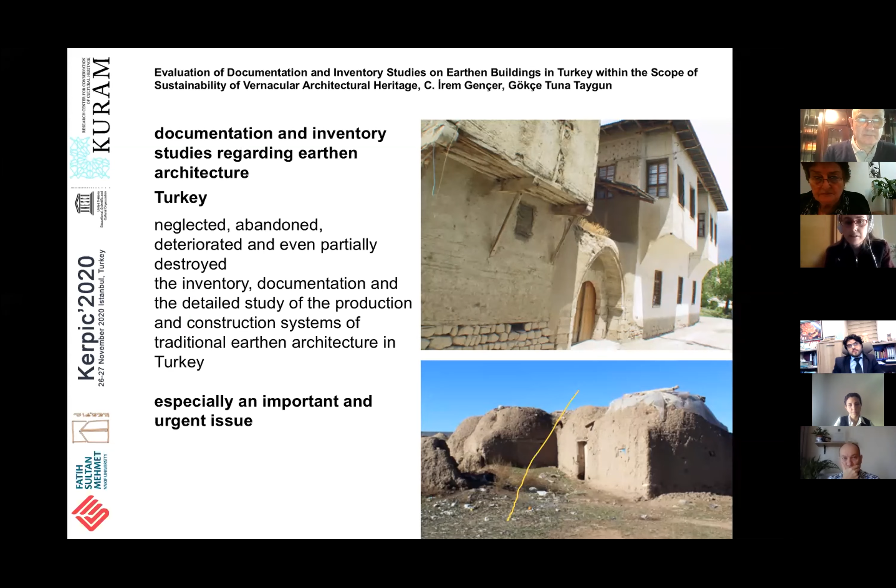Some concluding remarks: the intrinsic knowledge accumulated in vernacular heritage over the ages is very valuable, especially with rapid technological advancements, mass building constructions, and ever-increasing natural and man-made disasters. Vernacular sites are comprised of a rich variety of building types, embracing different beliefs and living practices, climatic conditions of the territory, and the use of traditional local building materials.

Therefore, inventory and documentation studies are conducted in Turkey and around the globe with the aim of preserving and ensuring the sustainability of vernacular heritage. These studies can be used for determining the physical conditions and preservation status of earthen buildings, and listing earthen buildings and sites when applicable.

These studies can also be used for renovating and repairing dilapidated earthen buildings and sites, recording the architectural history of Turkey, recording traditional construction techniques and materials, and differentiating between the varieties across different regions. They support the preservation of cultural heritage and its sustainability, and help in learning from vernacular architecture when creating new designs in harmony with the environment and climate, using resources efficiently, and supporting livelihoods economically and socially by reviving traditional construction techniques.

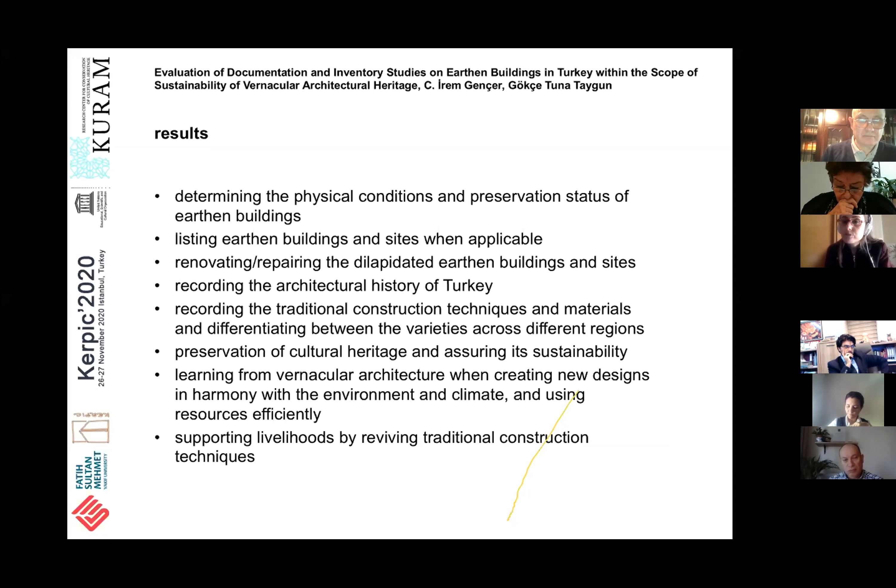Thank you for listening, and these are some of the references we have used in our study. Thank you.